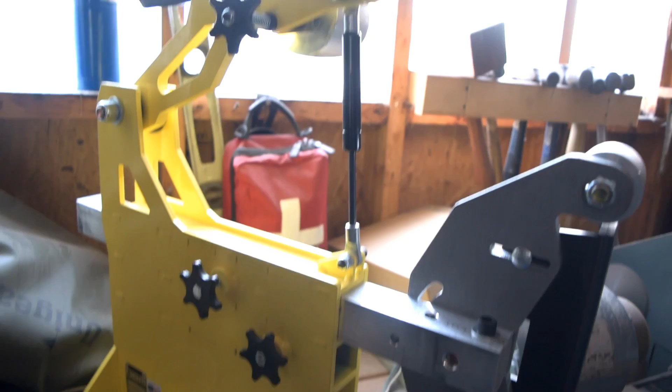I've been working here yesterday, building a table out of all steel stock, welding it up, fabbing one up, and that's what I'm about to work on today, because we desperately need a table. If you've been following me on Instagram, on Facebook, follow my stories, you would have seen this beauty right here.

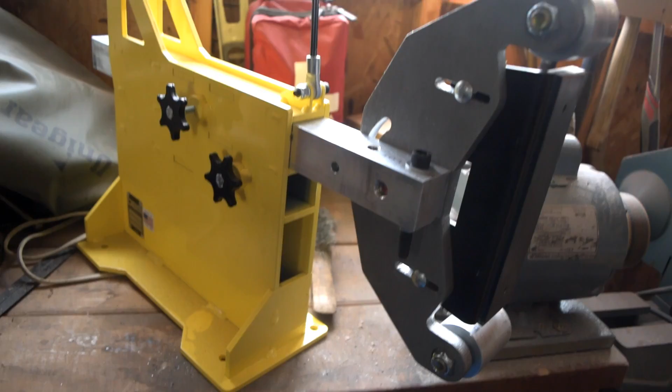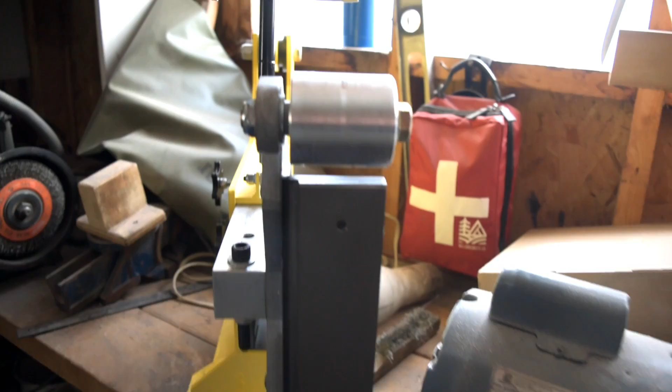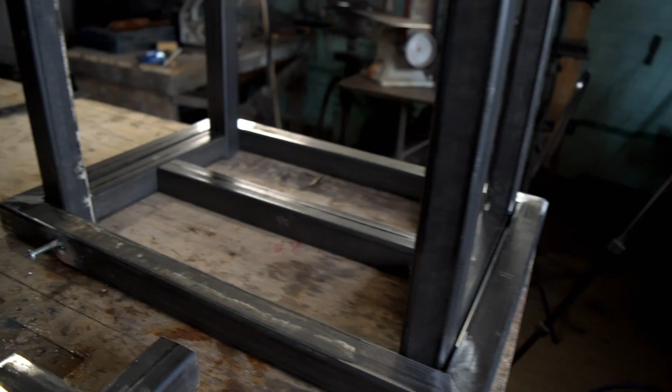Now this is a gorgeous OBM 2x72 grinder that I'm so excited to have invested in. I purchased it in December, and it's been on its way from the States. I also have a motor and VFD coming from OBM, as well as a bunch of other accessories that are on the way, but they're taking a long time to get here — not by fault of OBM, but by fault of the shipping company. With this big 2x72, and with that motor and everything mounted in the back, we need a sensible table, which is where this piece is coming in.

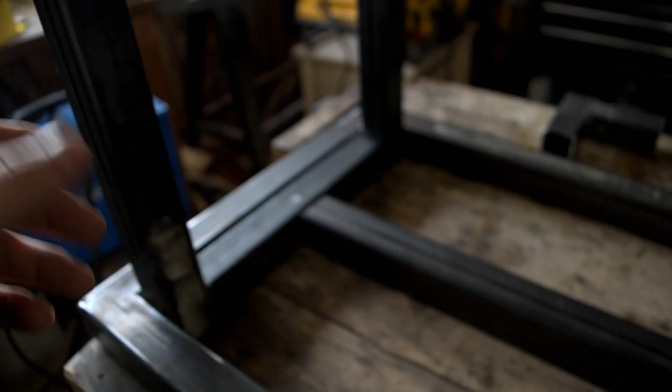I want something the right size. Let's stand it up there now. All I have fabbed up is just the top square with the 45-degree corners. So here's my plan: 4 legs mounted inside of that top square, then a brace here. That top square is fabbed up, and I just had the legs stood there to check my distances. Then this brace frame here will be up here somewhere on the legs, and that will pull everything in square and have everything just right.

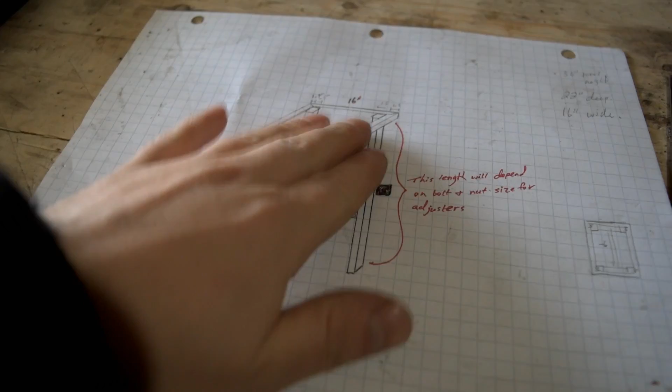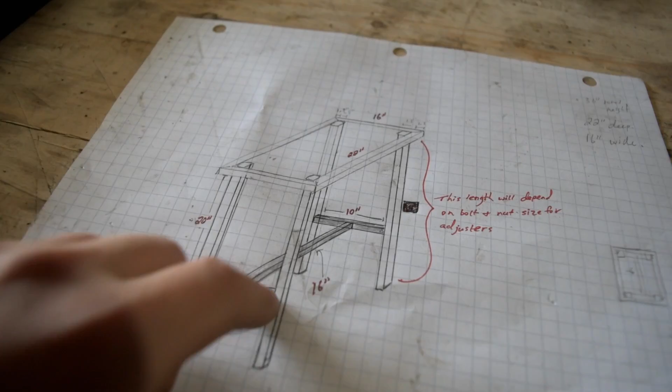Now my plan is to sheet over the top here with a real heavy gauge plywood. Plywood is good because it's strong — it'll let me bolt the grinder down securely, but it'll also absorb some vibration from the grinder, versus steel, which might have a bit more vibration. This bottom shelf here, I will probably do a sheet of plywood on this deck as well. This is going to secure the legs — you need this really, but also it'll give me room to put either a dust collection and/or a quench bucket there, just for keeping the blades cool while grinding. So that's at a height suitable for that.

Now I'm not a super experienced welder. I haven't been MIG welding for very long at all — I just picked up a MIG welder probably mid-2019. I've been fiddling around with it, and it's been fantastic for working on those smaller projects I've had to get done. I made a little small welding table, and a few other little projects, fixed a few things. If you've been following my Instagram stories, you'll have seen one or two of those projects as well.

But one thing I'm confused about, or struggling with, is keeping things square. It seems like you can make your cuts as square as possible, but getting them to end up square when you're done welding has been near impossible for me. All these cuts, I was so precise getting everything right, but I've just been struggling, and I'm wondering — short of having a huge heavy gauge welding table with holes where you can clamp and brace everything and bind it there while welding — is there anything I can do short of that?

I did make up, as perfect as I could get, this little 90-degree jig so that I could put my pieces in, clamp them to this, and then weld. I have been reading into strategic welding points, how to weld, because obviously — and this is how I started off — you run an entire bead on one side first, and that pulls things over.

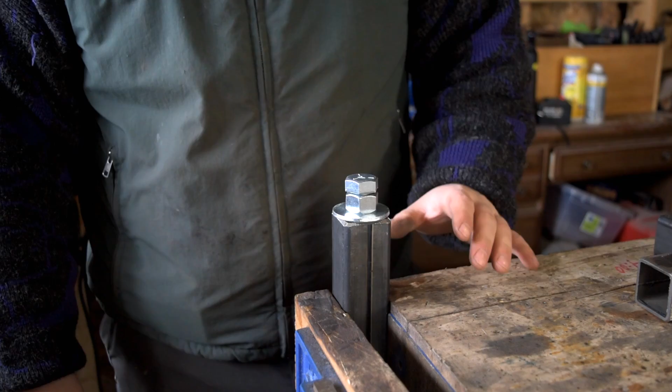But we're going to get to work on some more fab work for this table. Now, while I don't know a ton about welding, I'll share a few things I've come up with and learned. If you're building a steel table, which I've built a couple now, it's a nice project to practice on because it's not a big deal if it's not perfect—it's just a workshop table. But if you're building one, don't just build four legs with bottoms to go on the floor like this.

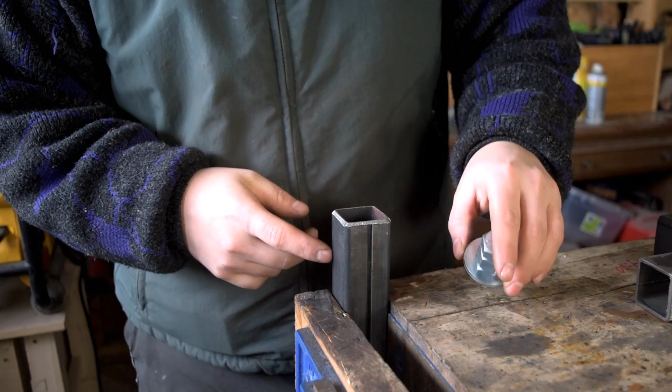Either your legs won't be perfectly in line with each other, and even if they are, the chances of your floor being absolutely perfect along that span is unlikely. With a wooden table, there's usually some flex, so once you get weight on it, the legs settle into those highs and lows. A steel table will not do that. If there's the slightest offset in the legs or the floor, it's always going to be that little click, click, click. And you don't want to be the guy shoving shims under the table legs.

It's really annoying. What you need is some sort of adjustable feet, and a lot of workstations you buy will have this. An easy way to do it, and what I'm using here, is a big washer, big enough to cap this off, then a nut and a bolt. The nut gets welded to the washer, the washer gets welded to the post, and that gives you adjustable feet. You want to pick a nice big bolt so you have a good surface to sit on the floor.

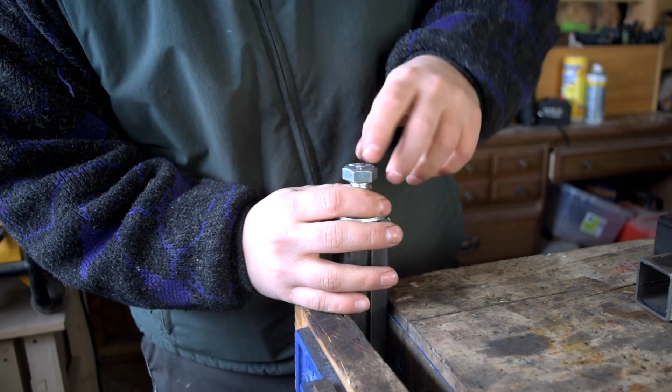Once you get your table in place where you want it, you just get down with a wrench and turn these in and out to adjust your legs so your feet touch the floor. I've used this before and it works quite well. So that's what I'm going to do now—install these on the four legs.

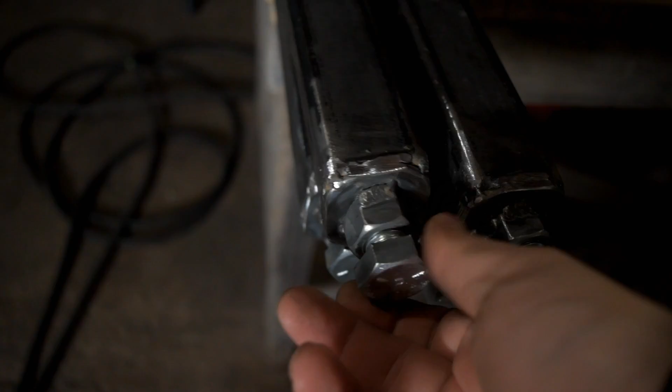So I have most of my welds laid out now. I haven't been too concerned with filming—it's so cold out here these days that filming is a real pain. I have two more episodes of Newfoundland Hobbies to finish up, and I can't wait, because I struggle to do that much filming when you're out in cold like this.

It's not very comfortable. Here's what we have so far. Everything seems to be nice and square, pretty good anyways. Got a few slight issues, but nothing that'll affect operation or that you can see by the naked eye.

Now this table is really heavy and brutally strong, and there's about $100 worth of steel in it. This is what's left over out of the $100 worth of steel I bought—it's 1.5 inch square tubing, 1/8 inch walled, and that's $100 worth to build that table right there.

Some of you might be wondering, with the amount of work and money I'm spending, why would I build a table so small? Why am I building it just big enough for the grinder? Why am I not building a great big table, probably six feet long or so? That's for a very specific reason.

At some point this year, I hope to have an actual grinding room separate from the rest of my shop. If any of you watch Alec Steele, ever since the first time I saw him have his grinding in a separate, sealed-off room, I thought that's the way to go, because that's the only thing here that completely pollutes my shop with dust. Anytime I'm grinding, whether steel or especially micarta, the whole shop gets buried in dust, and I don't want that.

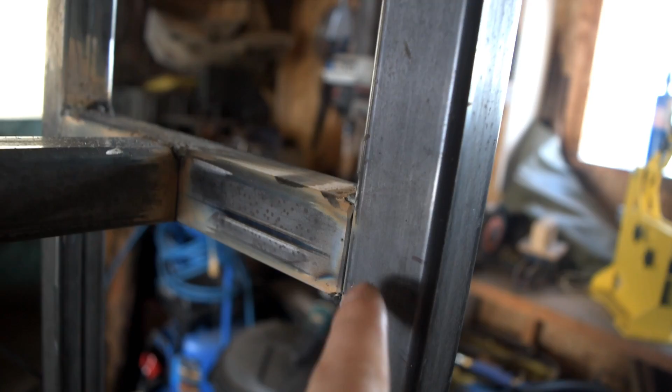I just have a couple more places, like here and here, to fill in a bead of weld. You can see most places I have done, but I've been welding kind of strategically so things don't twist out of shape. So there's just a few spots to go and fill in, like here and here.

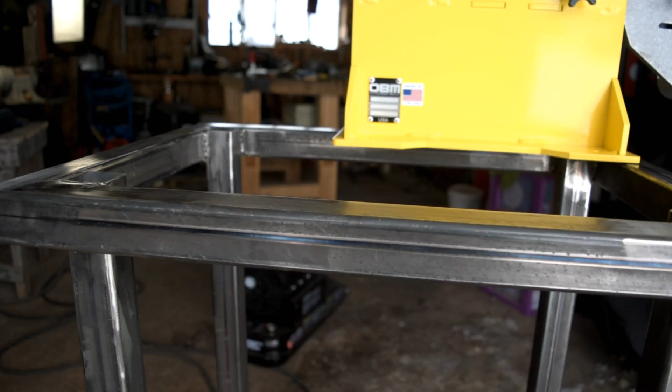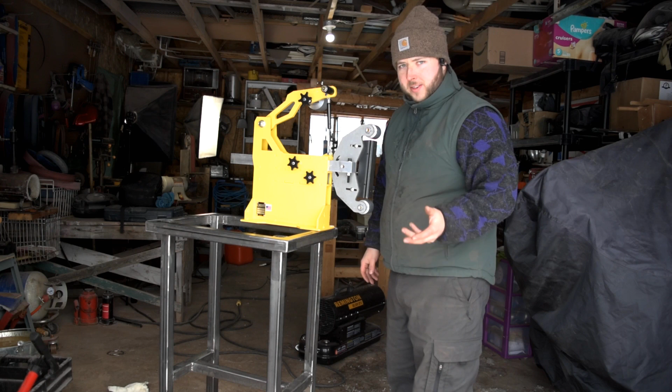This is the beauty of being able to do custom craftswork, and that is to be able to tailor stuff to your exact preferences. So this table is nice and compact to fit in a very small room, not take up a lot of real estate.

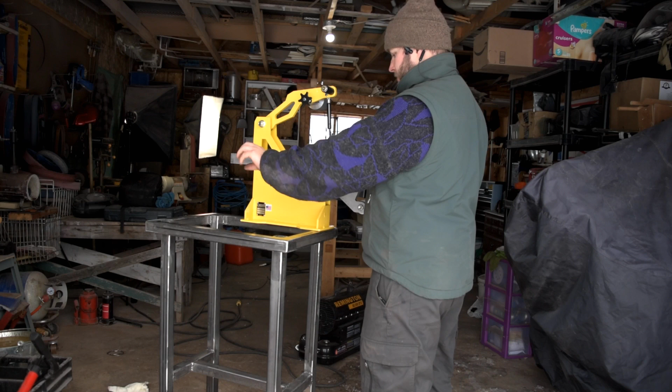Got that beautiful tensioning system on here. But what we'll have is a big motor mounted here that'll take up most of the width of the back. The drive wheel will come behind on this side. And then we'll have a VFD, which is my motor controller, mounted up here somewhere so I can control it.

I have this steel shelf right down here, it's a dip bucket. I built this right to my height preferences, because when you're grinding you don't want to have to be pulling your shoulders up, and there are days I'm grinding for three hours straight. I'm sure to some knife makers that's not a lot, but for me at a single time, it's a long time.

So if you're grinding for a few hours like that, you don't want to be up like this, and you also don't want to be down like this, because it's a killer on the back and shoulders. You want to be in a nice neutral position, and that seems to be right here, so you can just kind of move the body. I designed this so that I'm right in the middle of the platen when I stand like this, so that's my most steady position. I can kind of lock my arms in this position and work that grinder.

And then of course your blade gets hot, dip, dip, very simple like that. I can have a nice bucket of water there, and this should be a really nice setup. I'm also thinking I built this low enough that I could have a bucket of water, but also potentially run a 4-inch hose out here with a mouth for dust collection right here, so I can mount that off the table. Maybe I'll weld on a steel hanger or something to grab, because this thing throws dust mainly straight down to the floor, so it'd be nice to have that right there.